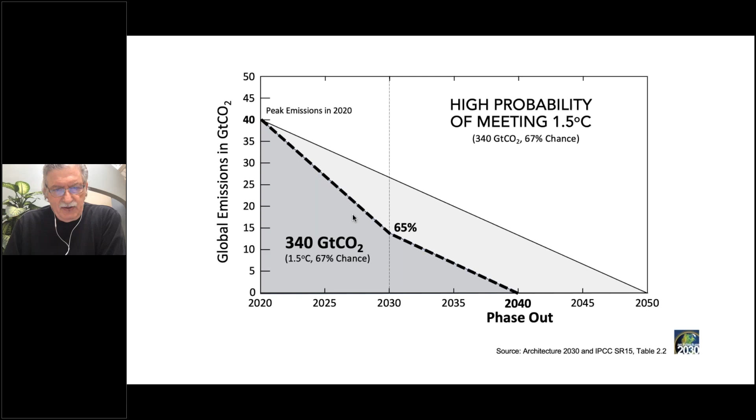So to meet the 340 gigatons, we need a 65% CO2 reduction over the next 10 years by 2030, and then phase out all CO2 emissions by the year 2040 in order to meet the 1.5. So anyone who's saying we're going to do this by 2050, that doesn't wash anymore.

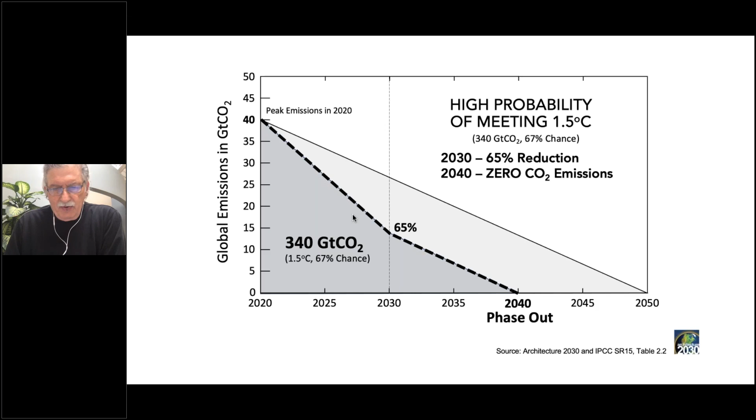And why is that so important? Because once you go past 1.5 degrees C, the planet keeps on heating. There's so much inertia and CO2 in the atmosphere that conditions get worse and worse, and climate change essentially, at any time in the foreseeable future, becomes irreversible.

The only way we can get a handle on climate change and temperature rise is to meet that 1.5 and then begin drawdown. There's natural drawdown, and planetary temperatures then begin to come back to the temperatures we've always known. It'll take a while, but that's the case we want to follow.

And why do we still see cities as growing? We've all heard that because of the pandemic, cities and density is a problem. It really is not a risk factor. A study of 913 counties in the US indicates that COVID-19 density is not an infection risk factor.

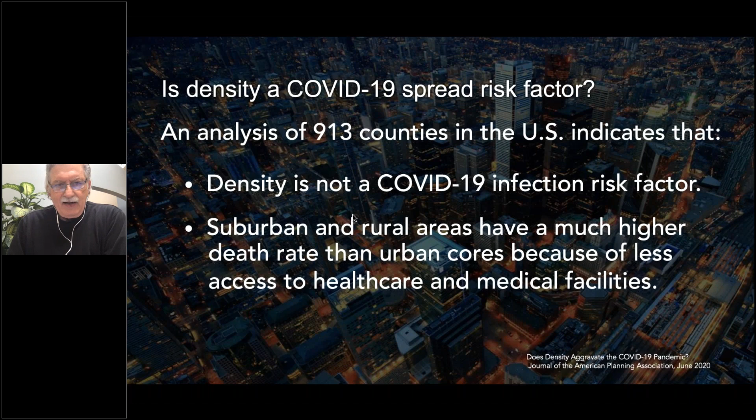So how do we get to carbon positive? How do we phase out by 2040 and get to a carbon positive environment by that time? Well, it's a two-step process. Step one is what we call planning, design, and construction, and going to electrification - we are going to have to electrify.

And then the second step is adding the renewables to meet the electricity demand. So planning, design, and construction, and electrification - that gets us 70 to 80% of the way toward a carbon positive built environment. We call that the no cost, low cost option.

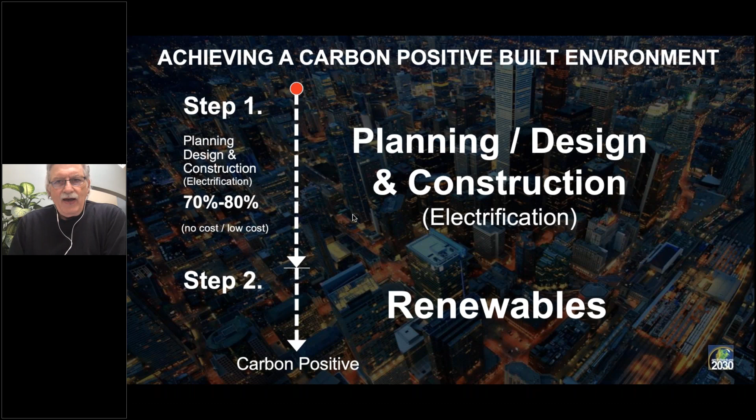And that's everything from urban growth boundaries, public transit, walkable communities, and bringing agriculture into urban areas in glass and glazed structures. That's beginning to happen so we don't take up all sorts of valuable land and degrade our forests. That's beginning to happen actually on a massive scale. For example, in China, a whole district now is going to indoor urban agriculture.

It's also everything from passive heating and cooling systems and daylighting systems, where we let sunlight into the building and then store it for use at night. It's a no-cost option, essentially a cost savings option. And daylighting, you all know about this and the properties of glazing in achieving it.

But we're also now concerned with building construction and building products. We'll talk about that in a bit. We have to get that to zero carbon, and we have to move to carbon sequestering materials also. That gets us 70 to 80% of the way there.

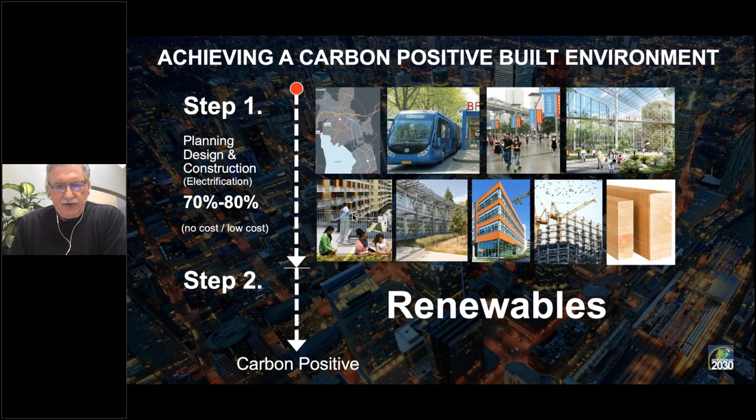Step two is adding the renewables, obviously if we're using electricity, and that's everything from on-site to importing and off-site renewables. Just to illustrate that we can get to that 80% is a no-brainer.

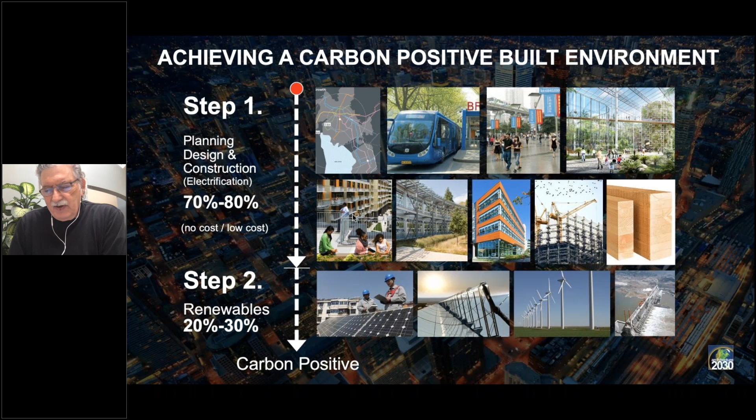In the 1980s, this was a library we did in North Carolina, all daylit, 100% daylit library, passively heated and cooled with south-facing monitors, for example. We were able to reduce energy consumption in that building by over 80%.

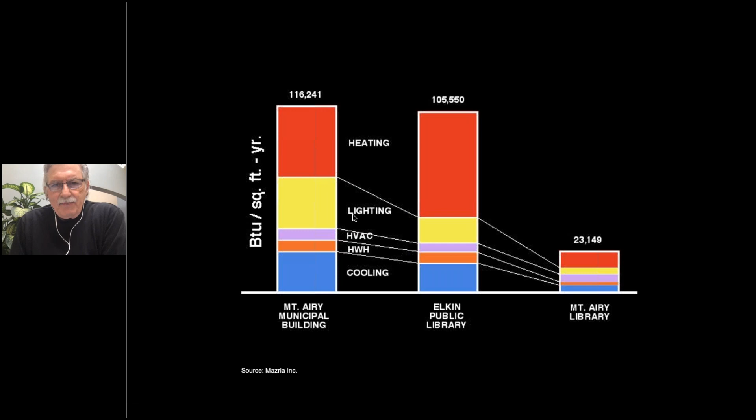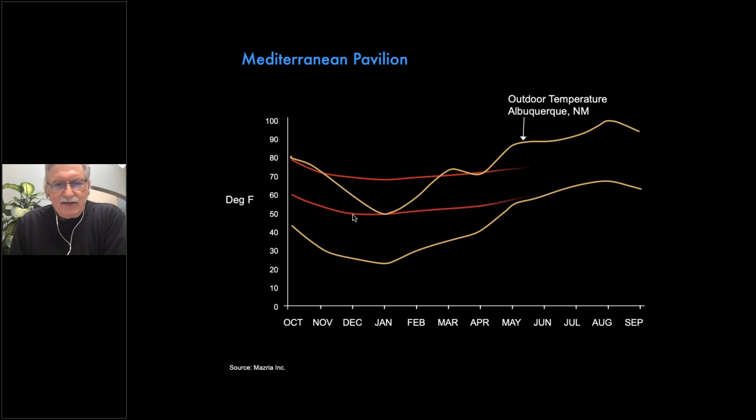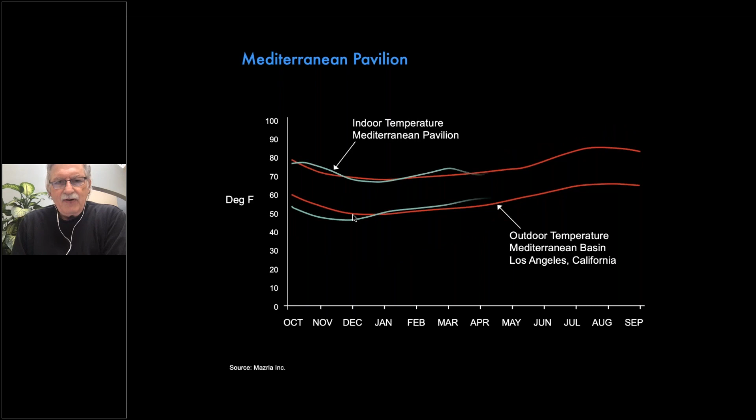What we did is within the model, we kept altering the properties of the glass on different sides of the building where we needed more solar transmission, a better U value. So the glass on each side of the building is different, although it looks all the same.

And we were able to then bring the temperature profile within the Mediterranean pavilion. This is actually monitored data over a year to match that of a Mediterranean environment without any energy input at all.

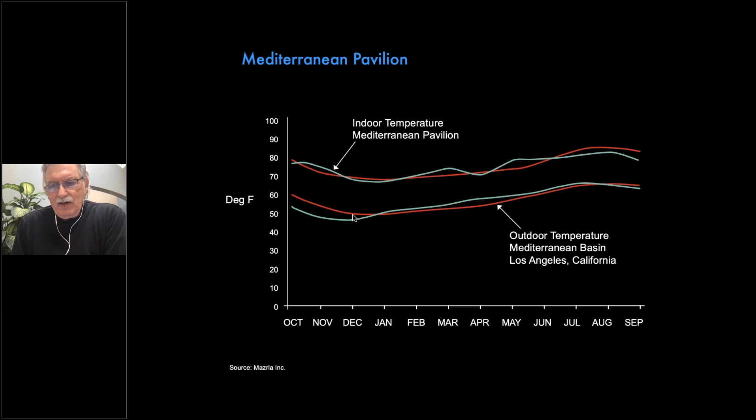If we look at what's happened since 2005 to today, we see that this is gross domestic product. We had a little bit of a recession in 2008, 2009, but then GDP took off and we had a very robust economy. And when we have a good economy, obviously we build, and building floor area went up 47 billion square feet during that period.

But look at what's happened to energy consumption in the entire building sector in the US. Even though we built 47 billion square feet, energy use is down in the building sector 1.7%. And if we look at emissions, it's down 21%. This decoupling of emissions and GDP and economic activity is unprecedented.

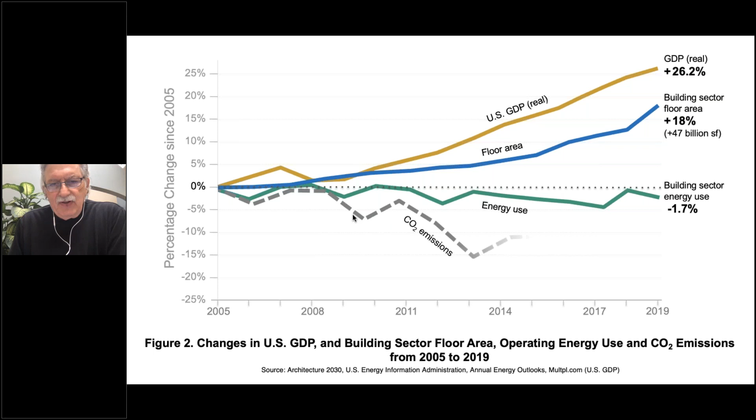In fact, we've saved people huge amounts of money by not increasing our energy consumption. So all of that talk way back, well, if we try to get a handle on emissions, it's going to ruin the economy and everything, is all nonsense. It's actually a benefit. And we're beginning to see that decoupling worldwide, where GDP is going up and emissions is beginning to flatten out.

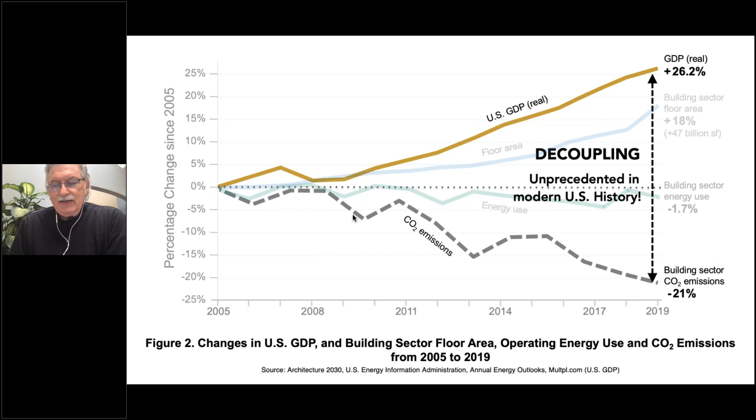So can we reset to meet the 1.5 degrees C carbon emissions budget? Well, there are three areas we have to address. We have to address new building operations, and all of you are familiar with that. We have to address existing building operations. There are hundreds of millions of buildings out there in the world today, and we have to address those.

And then we have to address materials, construction, and the infrastructure that connects all these buildings up, roads and sidewalks, plants, waste, and water. So we have to address all of that. So let's start with new buildings first. What do we have to do with new buildings?

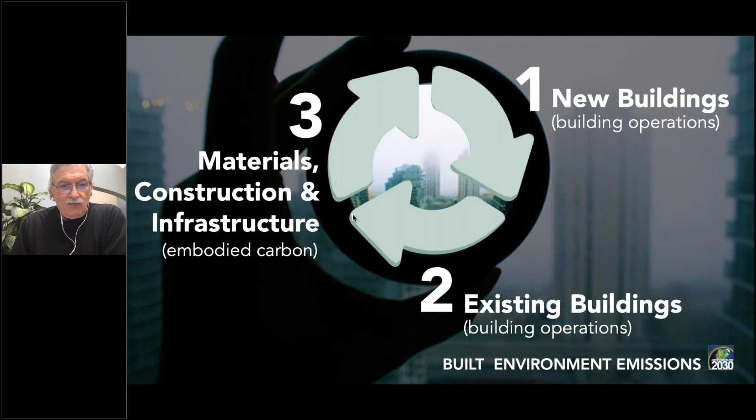Well, we have to bring new buildings in, all new buildings, at zero carbon building operations. So this is building operations. We actually now have the codes to do it. We have zero codes. We actually have an IECC code. With any year IECC that you're using, you can add an appendix onto that. It's in the 2021 IECC code that's coming out this month, and get to zero carbon.

So what is a zero carbon or a zero code? Well, it uses the existing code standard, so this is nothing new. You use ASHRAE 90.1 2016 as a minimum. You can, if you're using 2019, upgrade to 2019. You can use the 2021 IECC, the 2018, the 2015, doesn't matter. You add the appendix to it.

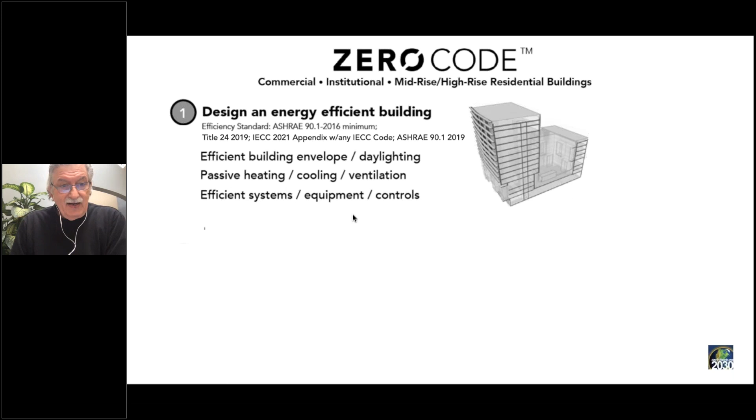You design an energy efficient building. You use passive heating, daylighting, all of those things. You get a fairly efficient building. If you use the code, you get a very efficient building, the latest code standards. And then you address the remaining building's needs with on-site, and if you can't do it all on-site, you do it with off-site.

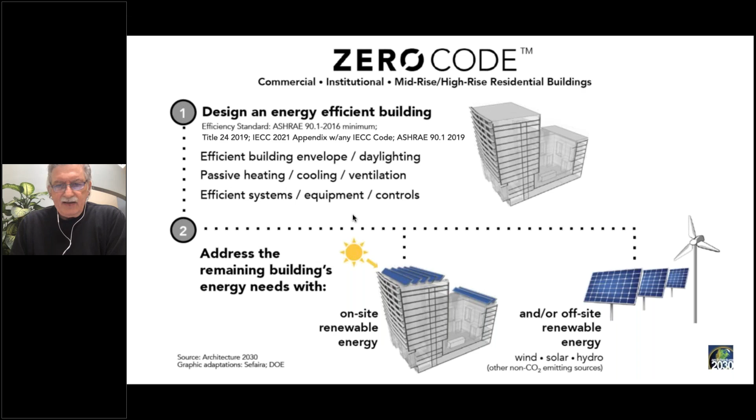It's in the IECC now. So if you're on the IECC system, any city or jurisdiction now can adopt the zero code. China now has developed a zero code, nearly net zero energy plus on-site and off-site. They just need to begin to get cities to begin to adopt it.

We're going to talk to them in a few weeks about doing that. And then Europe, at the end of this year, beginning of next year, all European countries are expected to have a zero code in place for all new buildings. So this is happening, and the tools are there and the codes are there. So what about building operations, existing buildings?

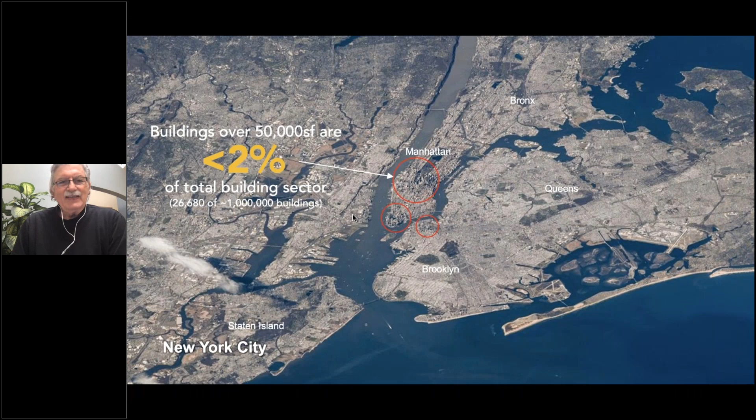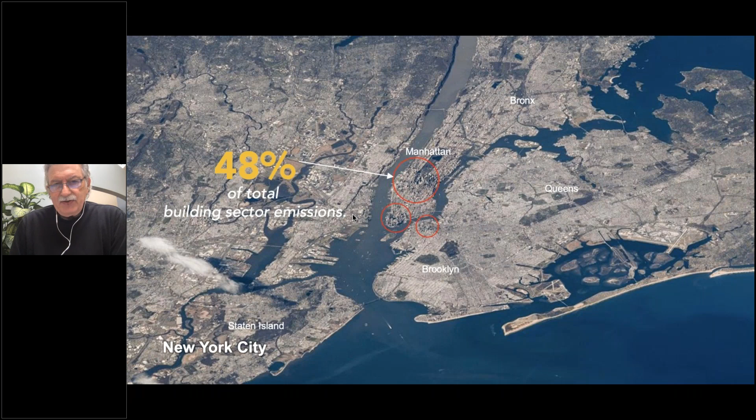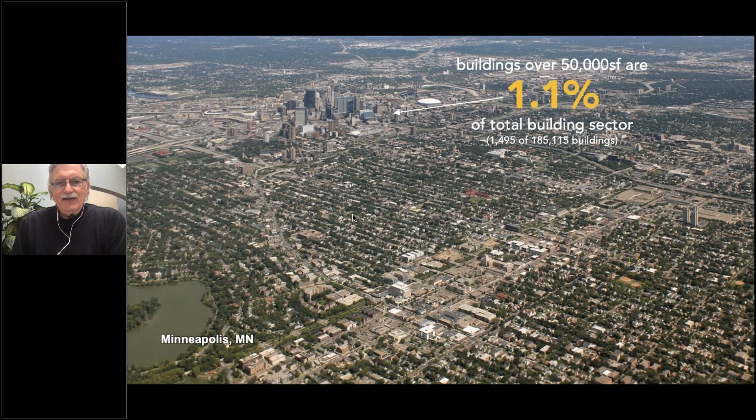So how do you then get to government policies for these existing buildings? Well, you first establish a threshold. What's the square footage where you have very big buildings responsible for about 50% of building sector emissions? Start with your biggest buildings, move down. You'll get roughly a square footage over 20,000 in smaller cities, roughly over 40,000 to 50,000 in larger cities. You'll then have half of the pie - that's 50%, big building emitters, 50% of total emissions. And then the other half is thousands and thousands of buildings responsible for the other 50%.

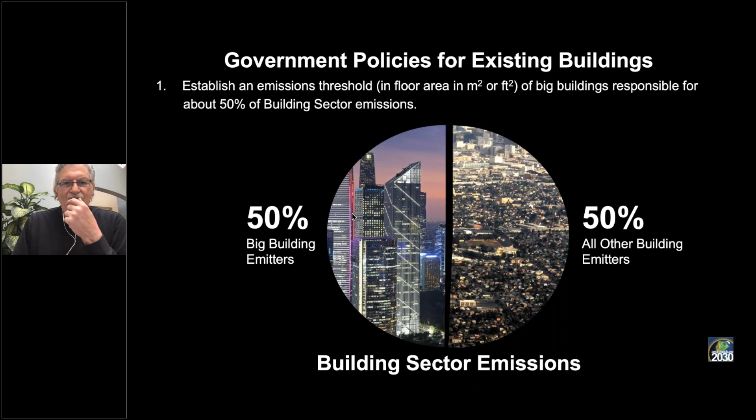So now we know where our emissions are coming from, which big buildings, which small buildings. So now we can establish a big buildings emitters policy, and that is a date certain. We say by 2030, you have to electrify those buildings and use renewables for the electricity. You can do it any way you want, on-site, off-site renewables, efficiency. You have 10 years to do it. You'll usually hit a capital improvement cycle, and if you do it then, the cost is really minimal to do this. That's why you give them 10 years.

So you're not forcing anybody to do it in year one, and then you provide all sorts of incentives to get people to go first. Give them low interest loans, tax abatements, on-bill financing, equipment discounts, you name it. There are all sorts of incentives you can get. You can get those few buildings to zero carbon by 2030 and reduce your emissions in the building sector by 50% by 2030.

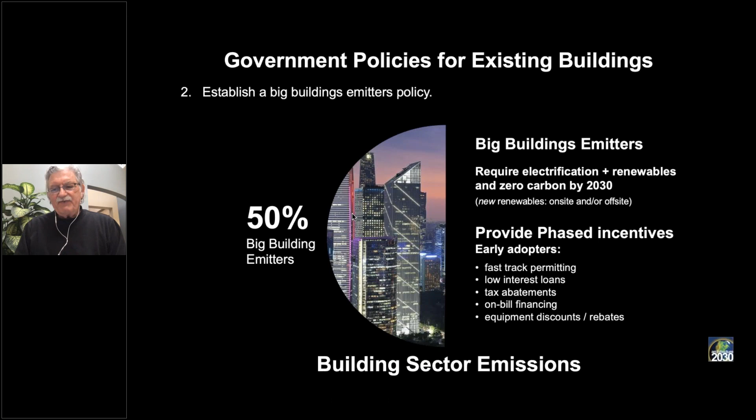Now, then you have to establish what about policy for all those other millions of buildings that are the other half of the pie, 50%. Well, for all other buildings, we say you require electrification and renewables at building intervention points, when a building is going to usually be renovated or people have the money to do it. So if you're going in for a zoning and use change and the city's giving you something for nothing, well, require electrification and renewables. What about point of sale?

Somebody buying a building in any of these cities that have money, the financing's in place, they're usually going to renovate. You require them, again, to go to zero carbon. And you provide the incentives for others who want to do it now just to save money, to go to electrification and then add the renewables either on-site and off-site. That's how you get to the other 50% by 2040. You renovate and get to electrification and renewables by 2040 for the entire building sector in cities that way.

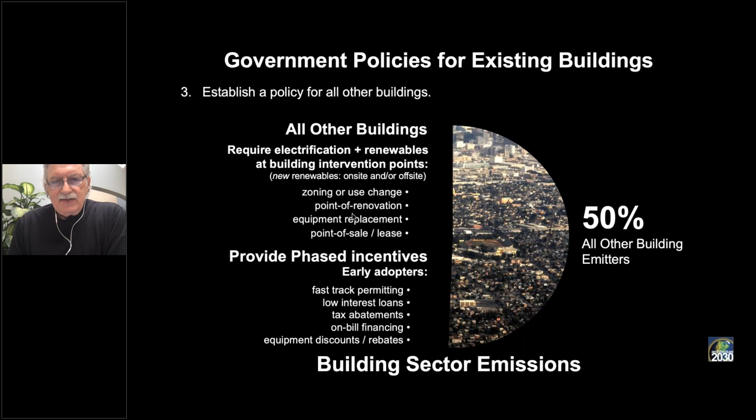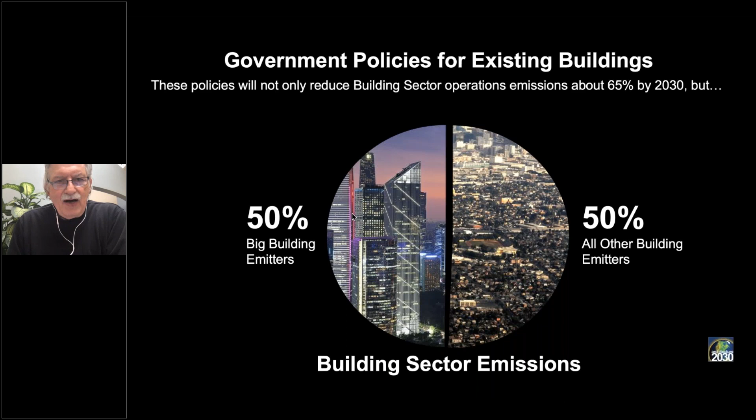And there's a bonus. These policies will not only reduce building sector operations by 65%, but if you renovate a building—let's say you put a whole new skin on the building, a glass skin, and you use selective coatings and vertical solar and things like that—a newly renovated building will not be demolished anytime soon because you put in a lot of money. That saves a huge amount of embodied carbon, the core and shell of a building. So you get a big benefit.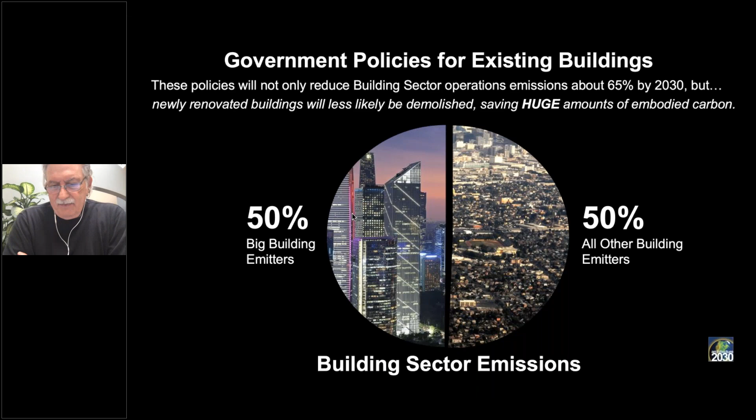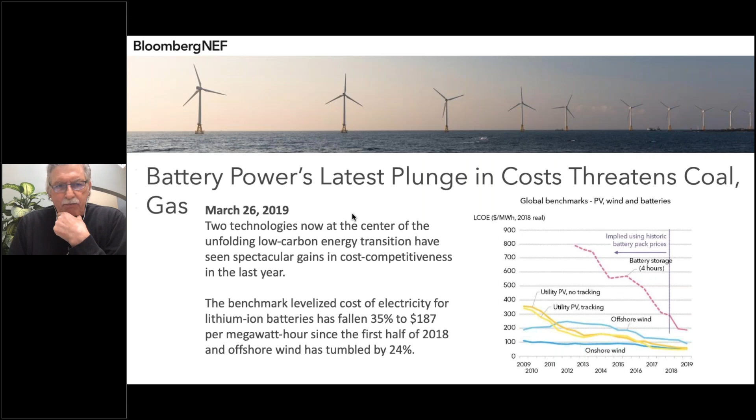Now, talking about solar, we're seeing battery prices tumble, threatening gas and coal. Solar is now, according to the International Energy Agency, the cheapest form of electricity in history. And we're beginning to see solar smash records, even when we have a government that is not conducive to pursuing solar and providing incentives and other things.

In 2016, we had our largest increase in solar in gigawatts—17 gigawatts. This year we installed 37 gigawatts of wind and solar in the US. Think about that, 37 gigawatts. If we do 40 to 45 gigawatts a year, we phase out carbon within the time frame to meet the 1.5 degree target, because energy consumption is not going up in the US building sector, which uses almost 70-75% of all electricity produced. Every time you add a solar collector or a wind farm, you're replacing fossil fuel energy.

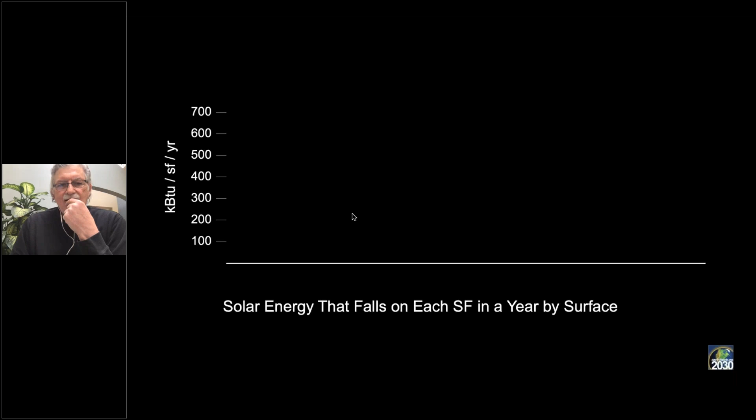Just to illustrate this—Seattle, Minneapolis, Honolulu, Atlanta. This is the roof and the south facade. This is how much energy, free, falls per square foot of roof area. It's distributed—you don't have to dig up anything, you don't have to do anything. It's there on a daily basis. KBTU per square foot per year. This is how much energy falls on the south facade, per square foot over the year.

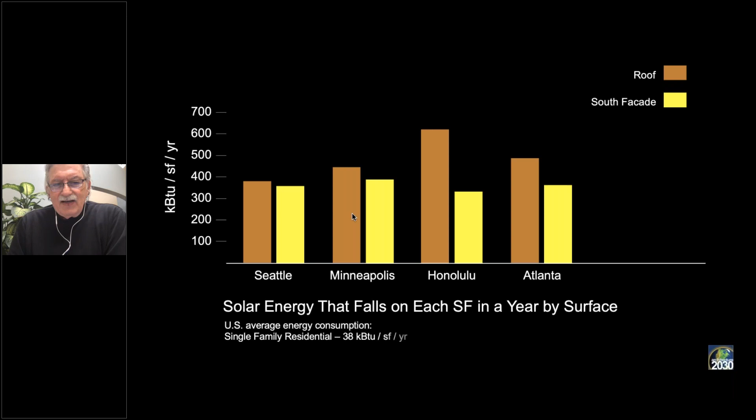Now let's look at average energy consumption. This is how much energy, on average, a residential building uses per square foot of floor area—same thing, per square foot per year. And that's how much a commercial or institutional building uses. If you build them to the latest code standards, they use half of that amount or less.

So let's look at Minneapolis. That's how much falls on the roof and south facade. That's how much falls on the east and west facade. That's how much a typical residence uses—built to code, shown in the brighter red. If it's built to code, that's how much you need. You get so much more than you need—you just have to convert a portion of it.

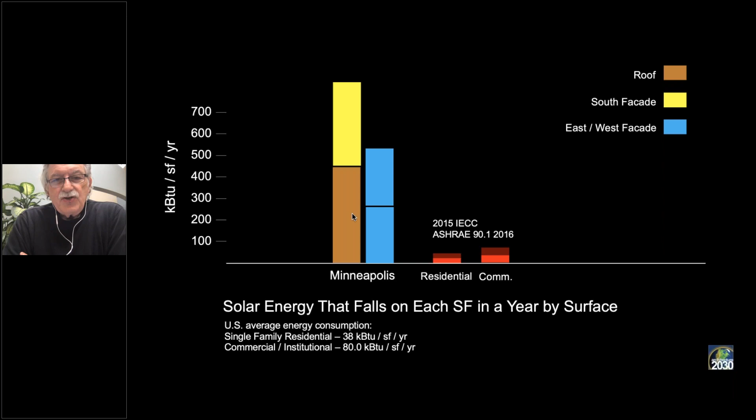Now, we can send spacecraft throughout the solar system and take measurements of the rings of Saturn, for example, and we can't solve this problem. This is energy distributed free to every site in the US—every site.

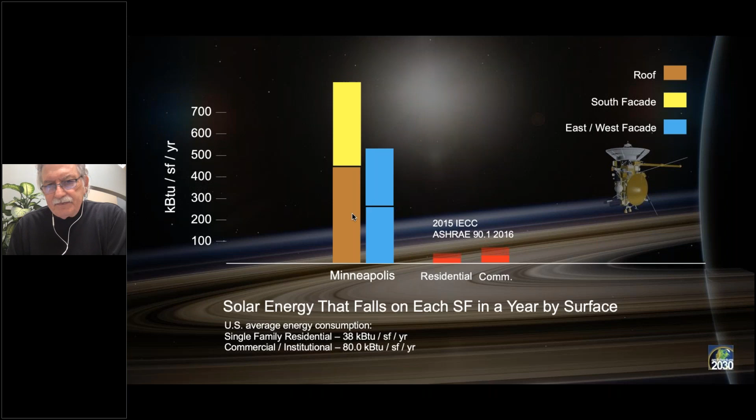And all of a sudden now people are understanding this, and we have companies like SolarSkyrise, a startup company. In dense urban areas, they estimate your energy consumption, show how much vertical solar you can get, estimate the cost, the payback, and your asset increase by going solar. So we can do it in existing buildings and new buildings—it's a no-brainer.

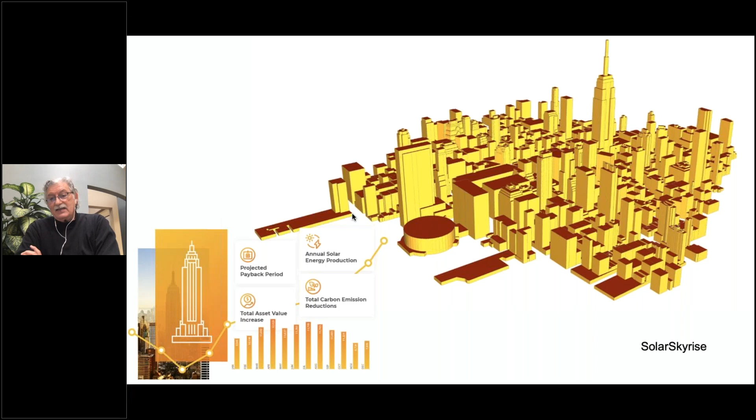And you'll hear, I'm sure, from the folks at NREL today, that on the horizon transparent solar panels are coming, so that every glass installation can actually be an energy generator. You couple that with on-site renewables or plug into the grid for backup, and we should be able to get every building essentially to zero carbon building operations.

Okay, now let's talk about the elephant in the room. Those two are actually easy to do—new buildings and existing buildings. What about materials, construction, and infrastructure? Well, there are literally millions of construction materials to choose from.

We can choose everything from brick, glass, wood, concrete, steel, vinyl, sheetrock, you name it. There's carpet, paints, wiring, electric bulbs, mechanical systems, plumbing systems. There are so many materials that go into a building. How do we get a handle on all this?

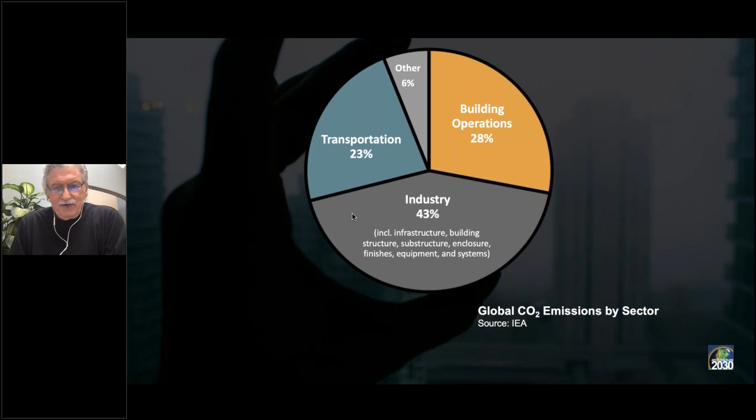But infrastructure, building structure, substructure, everything falls into that. Well, this, 2 years ago, we had a breakthrough. 11% is core and shell of a building. That's the cement, steel, brick, glass, everything else is about 11% of total emissions. But all the rest of the building sector and infrastructure falls into industry, and that's another 32%.

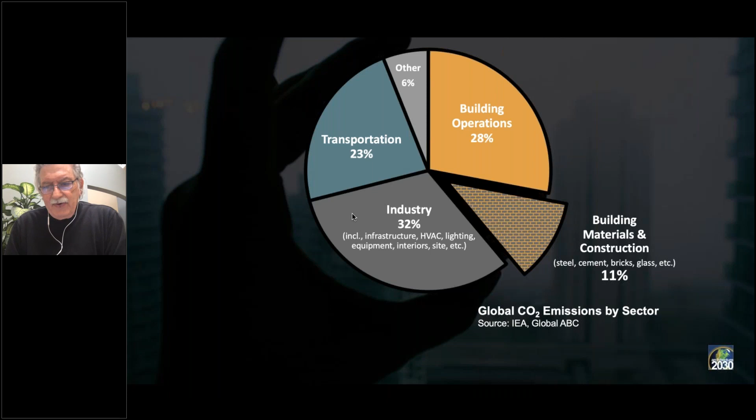So there's still thousands of materials. How do we get a handle on this? Well, we took another stab at this, and we reshaped the pie. And lo and behold, we see that just two materials, concrete and steel, and if you throw aluminum in, which is about 1.5%, concrete and steel are half of all industrial emissions and over 20% of global emissions, just two materials. Now we see, it's kind of like the big buildings, small buildings, concrete and steel and everything else, all the other thousands and thousands of materials. That's how we get a handle on it.

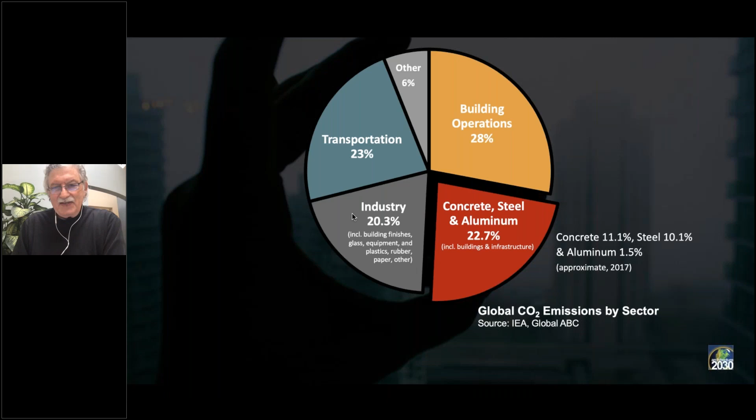We know that for buildings, the core and shell, the structure and substructure, that's the concrete and steel, getting that built is about 55% of all the embodied carbon emissions in a building. And then the other 33% is the building enclosure, the brick, the glass, the interiors, is everything else. So that's roughly most of the energy and embodied carbon that goes into a building.

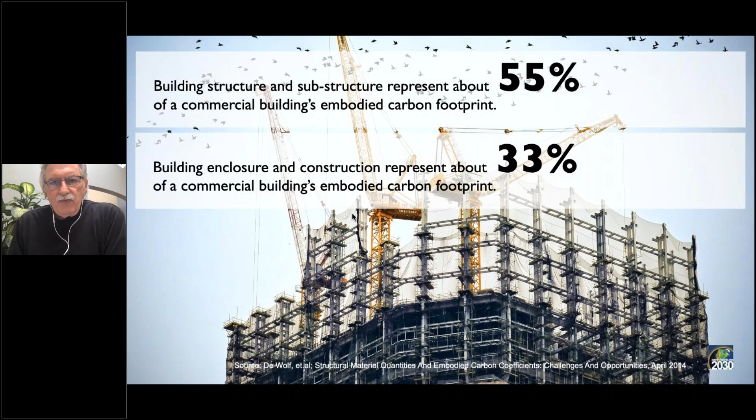So the first thing we want to do is get a handle on that 55%, and then all the other materials, get a handle on that. So the first thing we need to understand is that the conversation is changing.

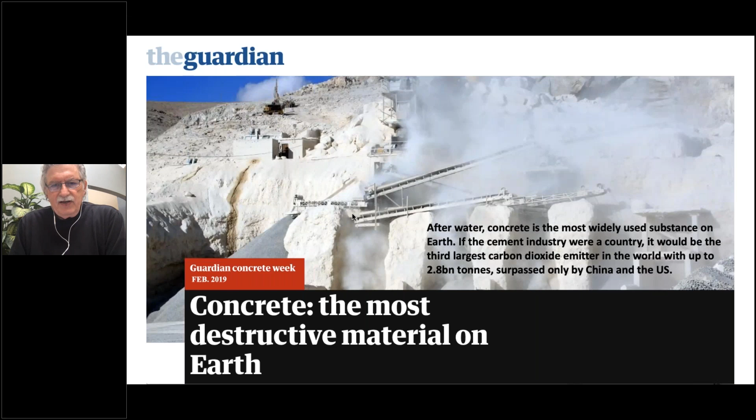This began roughly 2 years ago. And all of a sudden, now that we know concrete and steel matter, the mainstream media has picked that up, and you're beginning to see a huge amount of pressure put on those two industries. Concrete, the most destructive material on earth, steel makers in the crosshairs, mass timber giving them a run for their money. The concrete people want to talk about mass timber. Maybe it's not that good.

But architects now are looking at mass timber as a way to sequester carbon if it's done sustainably and from a sustainably managed forest. It's all northern woods, so you're not deforesting in the global south, or in tropical forests. So it's giving wood and it's giving steel and concrete a run for their money now. That's pushing concrete and steel to change very, very quickly, and they are changing. We'll talk about that in a minute.

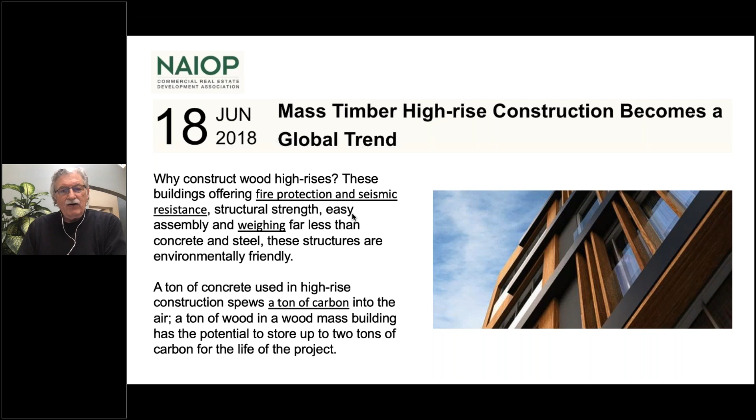But as we get concrete and steel under control, the other 33%, the shell of the building, interiors of the building, they're starting to, with just this year now, see the architecture and design and planning and construction and materials community look at that. So glass, vinyl, drywall, beginning to get a look, and those industries will be pushed to get to zero carbon.

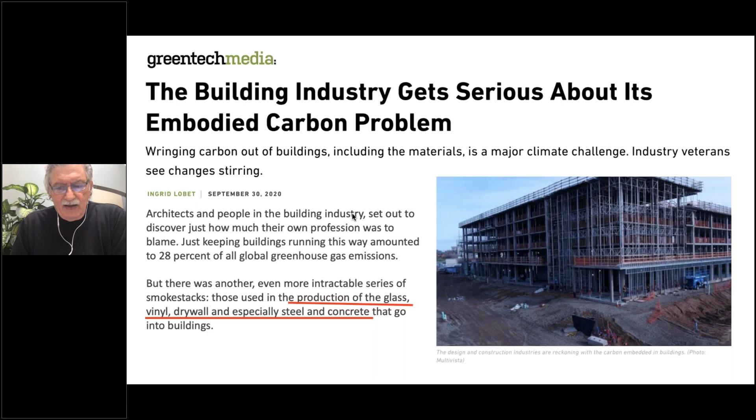So the way we address zero carbon in embodied carbon is to promote low to zero carbon materials. We know glass does a great job with operations, building operations and daylighting and health and all sorts of things. But to get to zero, and we're not talking about net zero now, we're talking about zero carbon, we're calling for a 40% reduction by 2021 in all buildings.

We're talking about that starting right away, comparing different companies that produce materials. And then concrete and steel by 2030, and all materials by 2040. So 20 years for all materials.

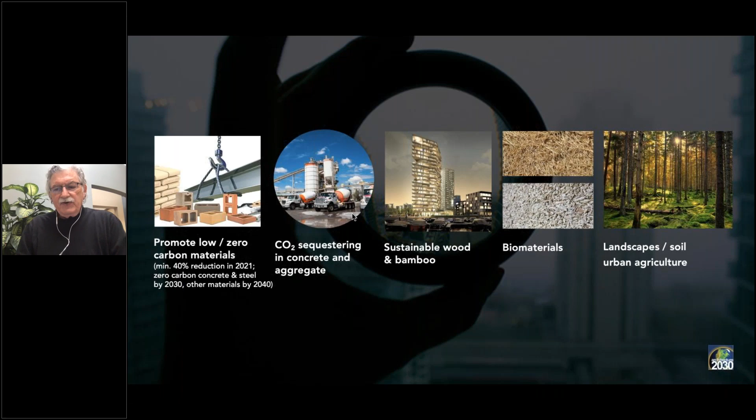We're beginning to see concrete and steel transform: carbon sequestering in concrete, making aggregate out of CO2, using sustainable wood and bamboo in buildings, biomaterials for insulation, and actually using landscape and soil and urban agriculture for drawdown. So that's all happening. And in the glass industry, we're now seeing talk about increasing the recycled glass content, product optimization, energy efficiency improvements, and electrifying where possible. But that technology needs to advance. And we've seen some talk about hydrogen. So we're beginning to see movement in many of the other industries, because we know we have to decarbonize by 2040.

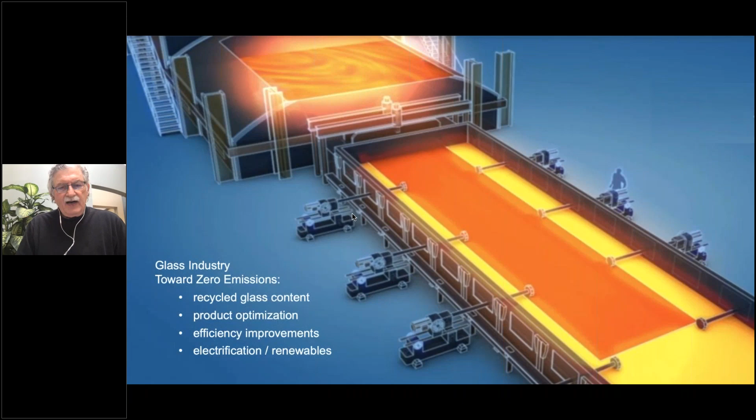Architecture 2030 has put out targets and standards for meeting the 1.5 degree goal. That means we need a 40% reduction now through efficiency measures across all materials, transportation, everything. Then a 65% reduction by 2030, just 10 years out, and zero carbon building products and construction by 2040. We're calling for high ambition companies to try to get a 50% reduction now.

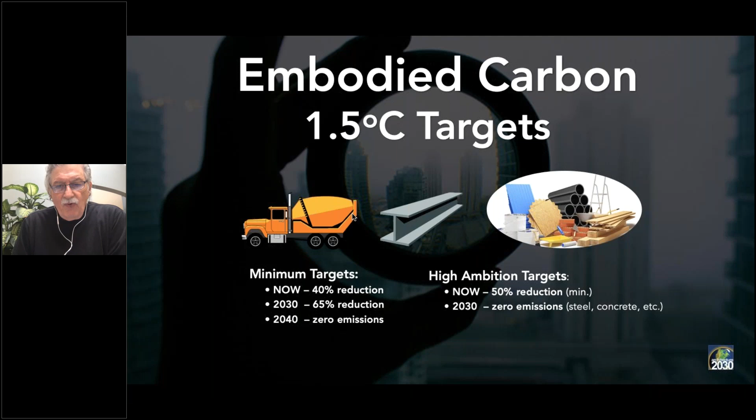And zero emissions in steel and concrete by 2030. We're beginning to see that already, by the way—electric arc furnaces for steel. If you just use an electric arc furnace and specify US steel, you get roughly a 50% reduction compared to a coal blast furnace. A lot of that coal-based steel comes from abroad, so this also gets us local jobs. We're beginning to see all sorts of movement now on embodied carbon, and there are tools developed in just the last few years to look at embodied carbon in materials.

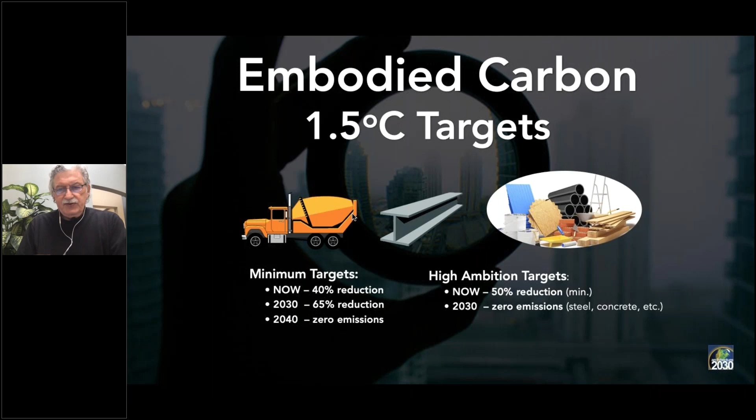Well, it started in 1925 in the Bauhaus. Structure moved inward—we started getting concrete structures, post and beam, which meant we could hang the wall off of the structure. This was roughly the first curtain wall building, all glass. We put the heating units by the glass and tempered it. Energy was cheap, so you could have single glass buildings. That was 1925, the first modern building.

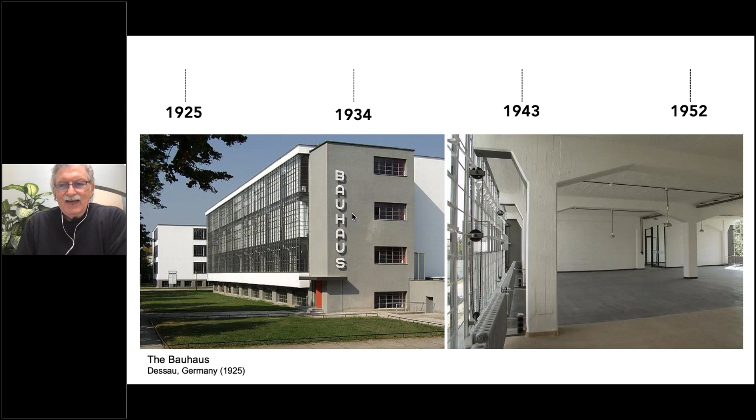This was going on in 1925, was the Model T truck. Pretty basic stuff—we didn't even have television. We had the first transatlantic call after the first modern building, in 1927. So that's what was going on in that time.

Conditions were really bad worldwide. A lot of asthma, coal being burned right next to housing. So the International Congress of Modern Architecture formed in 1928. The leading architects, planners, and designers of the time got together—conditions were so bad you couldn't even see the soot on the walls—and they called for a whole bunch of things.

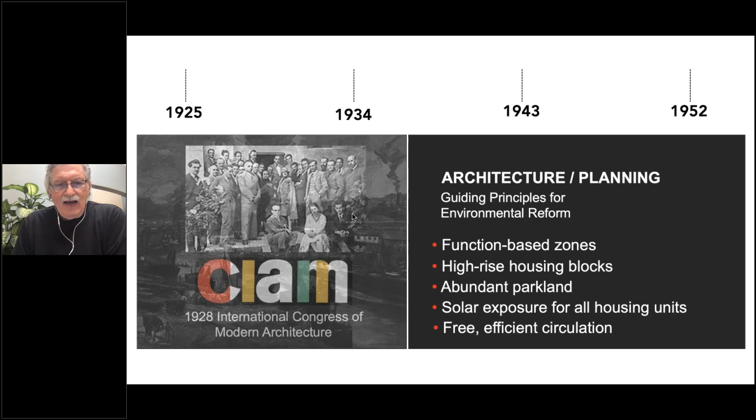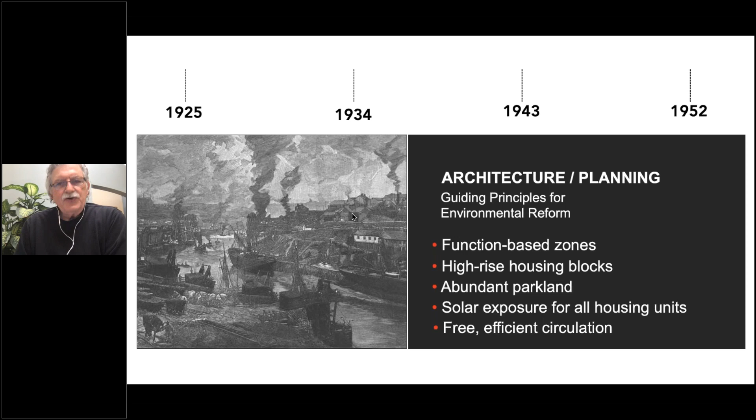That's how zoning came about—getting housing out of industrial areas, high-rise buildings with solar exposure and glass so you got light into them, with real utopian considerations. Le Corbusier set out the principles for modern buildings: column-wall separation, horizontal glass, lots of glass for a good indoor-outdoor environment and daylight, free design of the plan, and they even called for roof gardens. That was CIAM in 1928.

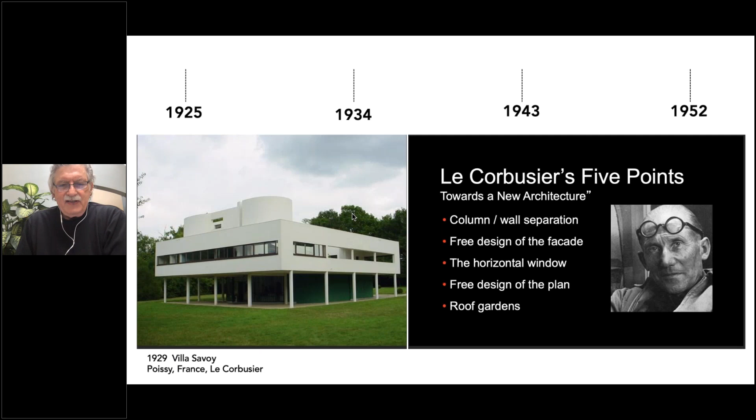By '32 we had an international style. Energy was so cheap you could climate control any building—you could design modern buildings and put them anywhere in the world. We didn't even have the first flight into New York until 1935. That gets us to '49, when Johnson built a single all-glass house, showing you can overcome any environment with energy inputs.

The beautiful Lever House, an all glass building. Curtain wall construction started in the early '50s and late '40s—you began to hang single glass walls off of frames, get high-rise buildings, and then you had the first modern town. We did all that in 27 years.

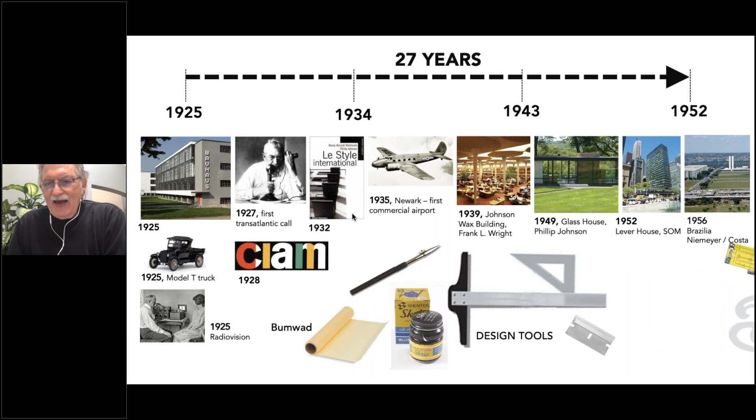And we did it with primitive design tools. Think about what we have now. The first ink pen didn't come in until 1960—before that we had to draw with ink and scrape it off if we made a mistake. We got the first ink pen in 1960, and the first laptop came in 1991. So the world was transformed in just 27 years with primitive tools. Think about what we have now, the computing power and the laptops.

And I'm talking to you through Zoom, with hundreds of people listening to this presentation. Think about it—it used to take us a year, two years to do a set of working drawings. Now we do them in a month, two months.

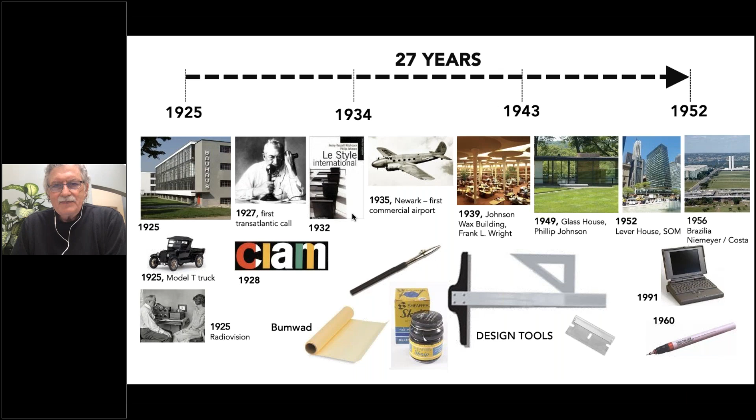So can we meet the 1.5 degrees C carbon budget? Everything is in place to do this. Of course we can. It really is up to our community—the design, planning, construction, and materials production community. It's those of us responsible for the built environment. We are the gatekeepers and we can do this. Thank you so much.